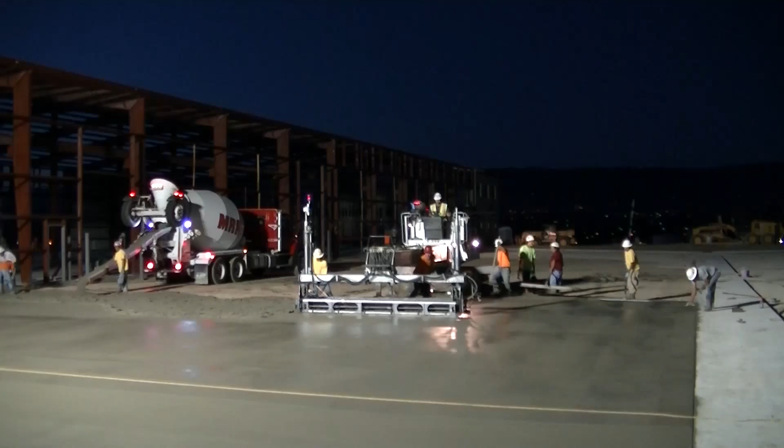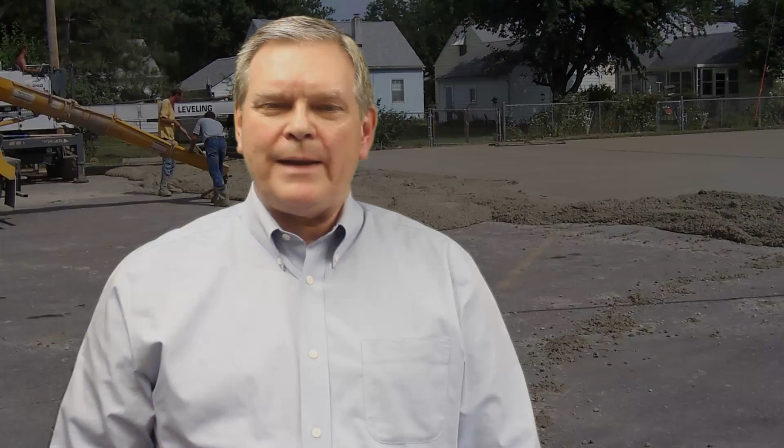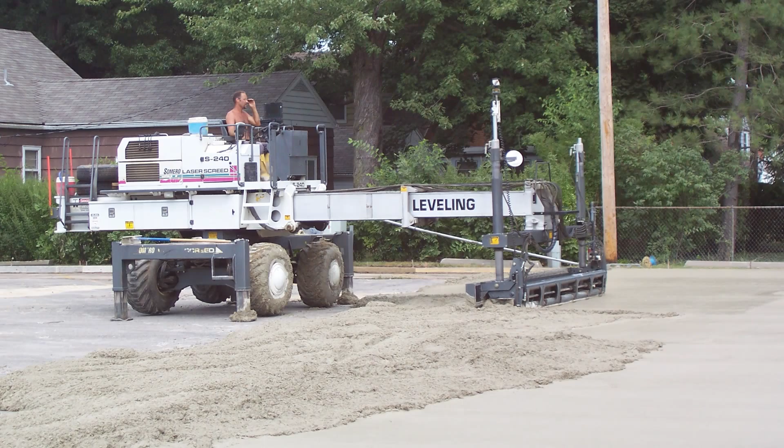Through the course of this video, we're going to walk you through the process of doing concrete overlays on top of asphalt parking lots. Now, this may be a concept that's foreign to some of you, thinking that you can pave directly on top of other pavements. But think about creating a composite pavement or resurfacing the existing asphalt with a longer lasting, durable concrete layer on top. Or if you want to add additional concrete to up the load carrying capacity of the existing asphalt parking lot to change its use.

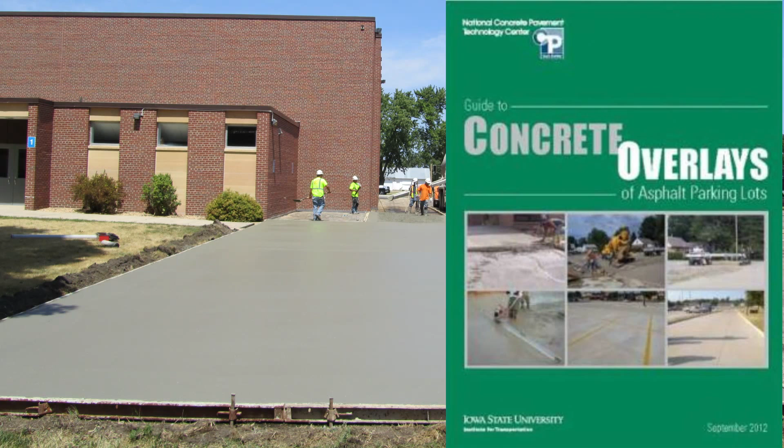We're going to be referencing today a guide that was prepared specifically for doing overlays of existing asphalt parking lots. And before 2012, a document like this did not exist. We've been doing concrete overlays of parking lots for over 40 years. So this is not a new technology, but the ability to take the technology and make it available to the masses across the United States has just come into being by compiling all the information into a concrete overlay guide. That concrete overlay guide was prepared by the National Concrete Pavement Technology Center, who is the expert in doing all types of concrete paving across the nation.

And it's a guide that's been put together to be geographically unsensitive. What do I mean by that? It can be used anywhere in the United States with any type of existing asphalt pavement in place, taking into consideration what the mean average daily temperature is for those areas, and that determines what the concrete thickness will be for any given application.

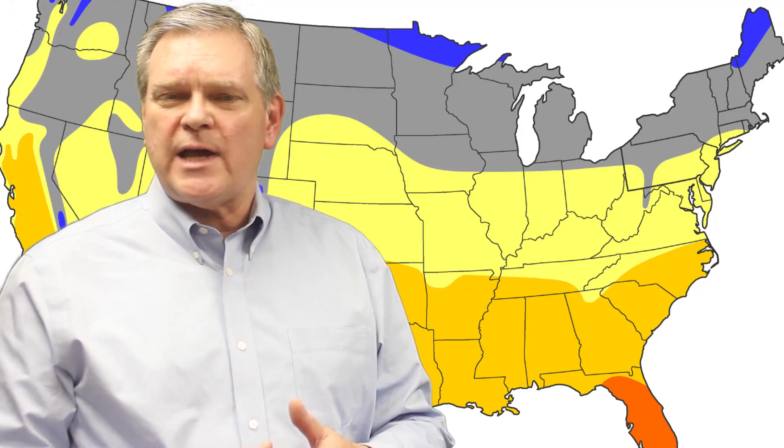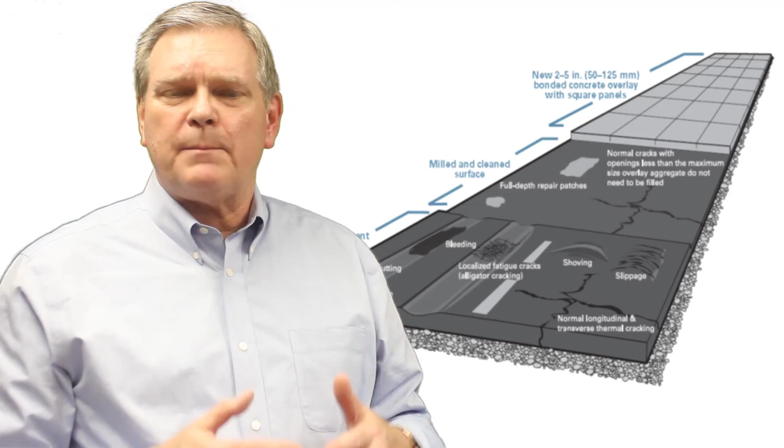This is a widely accepted practice, not only endorsed by the Ready Mix Association, but also by the Concrete Paving Association for doing composite pavements. And when we talk about composite pavements, we think about the terminology of doing layers and layers, building strength into a new pavement. And that's why a thin layer of concrete, something as thin as 2 inches, on an existing asphalt pavement works very well for long-term durability.

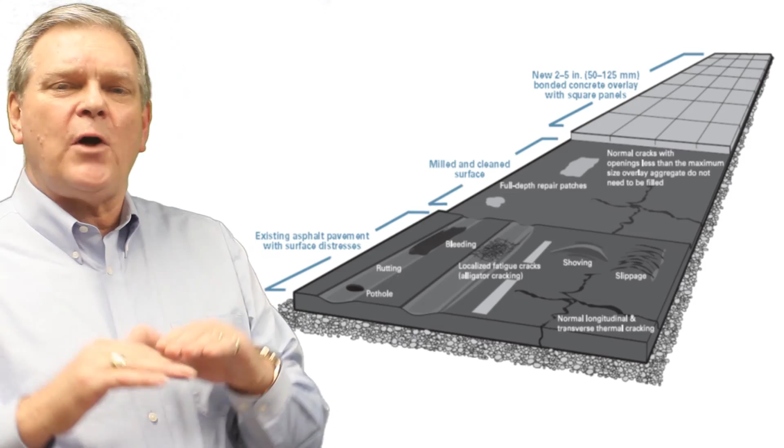Think about taking a piece of plywood, and this plywood gets its strength from different layers being bonded together. And that's really the concept we have when we place concrete on top of asphalt and we bond it to the old asphalt pavement.

The guide was put together in conjunction with the National Ready Mix Concrete Research and Education Foundation, who brought it to the industry at no charge. What do you mean by no charge? Well, it's free for a download that anybody can grab as a free PDF. You can buy printed copies for a very small fee, but it was not the intent of putting this document together to sell it for a profit. We wanted, more importantly, to get the information out to the design community on how to properly design, evaluate, and determine the thickness for the overlay.

It was also designed for the contractor, who could use the document to look at the best practices and the proven practices that have been developed over 40 years of research and proven applications to make these applications successful. In the course of 40 years, you learn a lot of things that will work, but you also learn a lot of things that don't work. And so the intent of this is to make sure every contractor has a proven guide to work from when constructing these overlays. Let's delve into why we wrote the overlay guide and why it's become the document for doing these types of projects.

Prior to 2012, when the guide was published, we didn't have any definitive document that would teach a contractor or a designer how to design and build an overlay project. We had a lot of other documents that referenced overlays on parking lots that really weren't, though, the guide for how to construct them. So we put together a team of experts, much like the concept of an ACI document, and we brought together industry experts from the engineering community and the construction community, and we put together the document with a committee of those people contributing the best practices and proven practices that have been done for over 40 years.

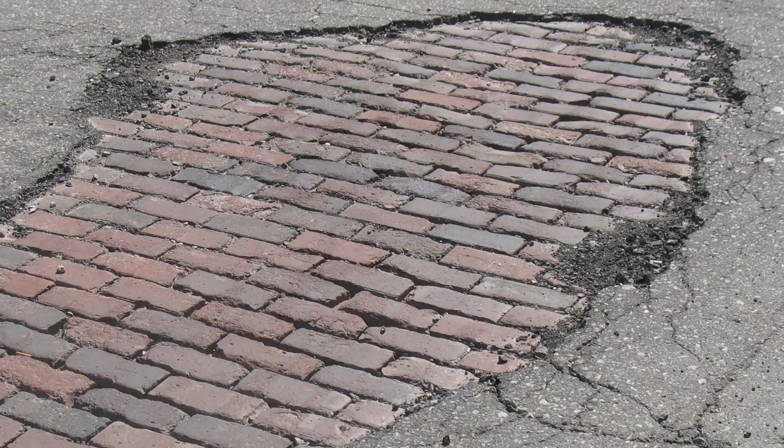Some of the tough things that were hard to do in the beginning were to determine what type of shape the existing asphalt pavement was in. We know that the asphalt pavement has a really good base under it, because one of the things an asphalt contractor does is prepare a very good base for paving the top course on. If we take a look at the existing asphalt pavement, we're able to determine what type of shape that existing asphalt surface layer is in, and also if there are any problems down below in the base layer, they'll show up in the way of potholes and sinkholes and maybe places where the pavement has either heaved or shoved.

By evaluating the existing asphalt pavement, we can then determine what the best approach is. The guide shows us how to do an observation of the existing pavement. It walks us through investigative procedures on determining what the thickness of the old asphalt pavement would be, and then with charts that are developed through the BCOA, which is the Bonded Concrete Overlay of Asphalt Pavements put out by the American Concrete Pavement Association, we are able to look geographically at that mean average daily temperature and determine what the thickness will be of the new concrete overlay.

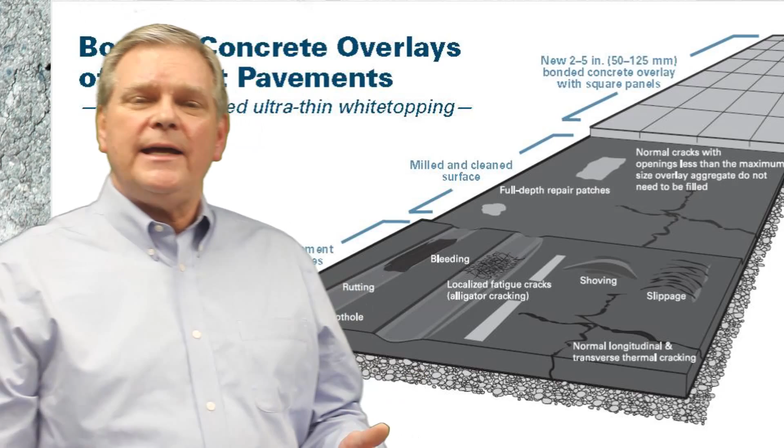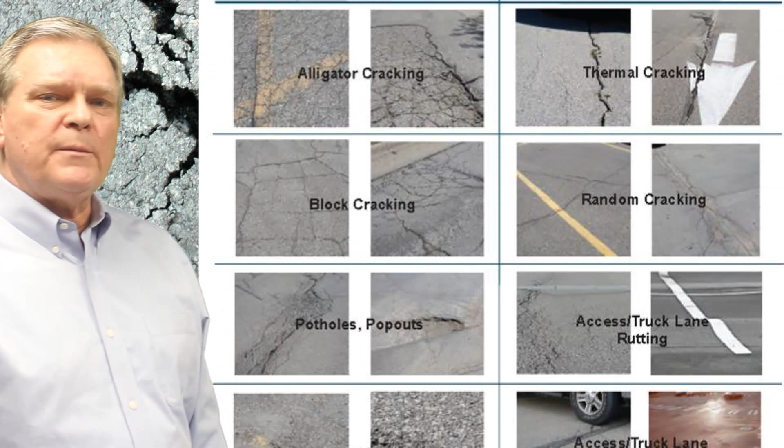And that is the beginning of our process of the investigation of the existing project. Once we determine what the condition is of the existing asphalt, we're able to determine what the best approach will be for doing a concrete overlay on top of the existing asphalt. By using the guides in the book, we give visual pictures on evaluating the condition of the asphalt and determining which type of distress we may have in the pavement, and we're able then to move forward by determining the thickness of the concrete that will be on top of it.

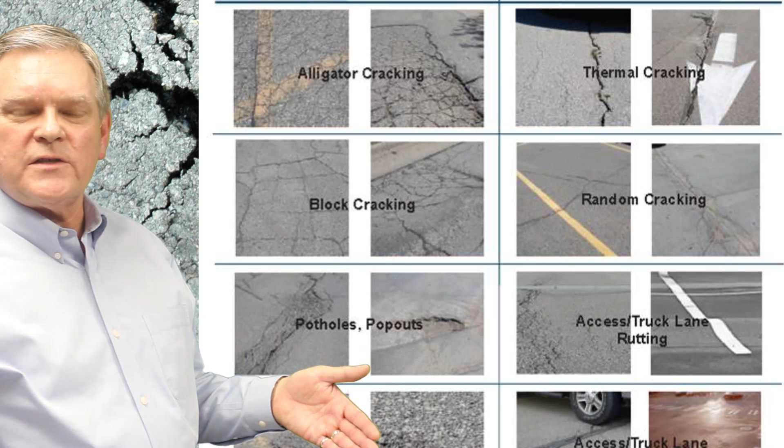We've then broken the parking lot down into three distinct areas: the heavy-duty loads, the light-duty loads, and the industrial loads. And you can see that we have now determined that maybe those thicknesses need to be different in those different areas of the parking lot based on the existing condition that the asphalt contractor left with base material when he constructed it initially. Then we determine what the joint spacing will be, and we lay out the joint spacing based on a conservative joint spacing arrangement, and we're ready to pave.

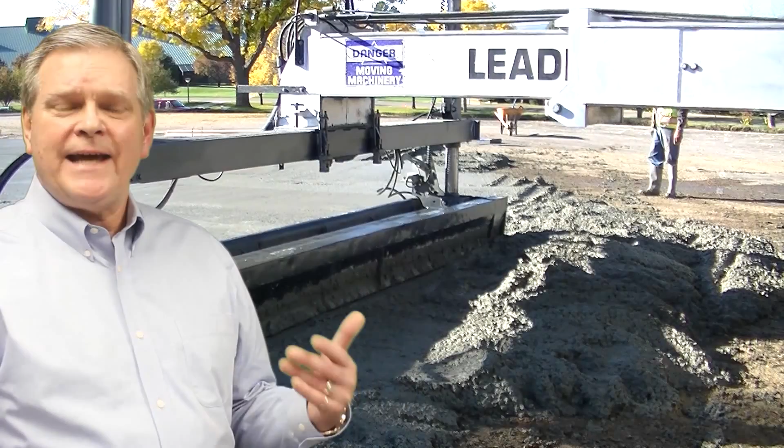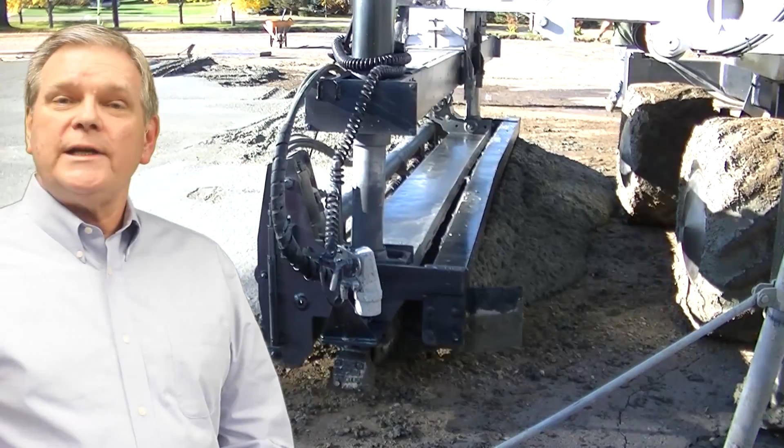From a construction standpoint, what has really moved this technology forward is the advent of the 3D guided laser screed that's come into play over the last 15 to 20 years. Prior to this, overlays of parking lots were done with string lines, hub stakes, pipe screeds and truss screeds, and it was a very long process. What has really changed the process is the 3D laser screed and the total station applications that allow it to read the existing contours of a parking lot and correct any low spots or bird baths that may occur in the existing pavement with the placement of the 3D laser screed.

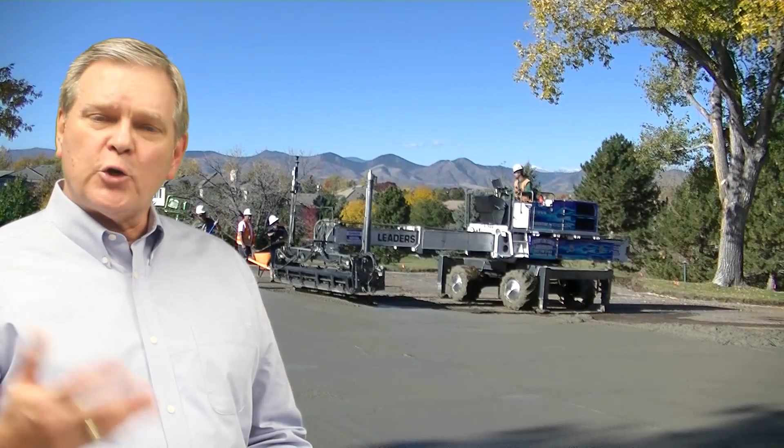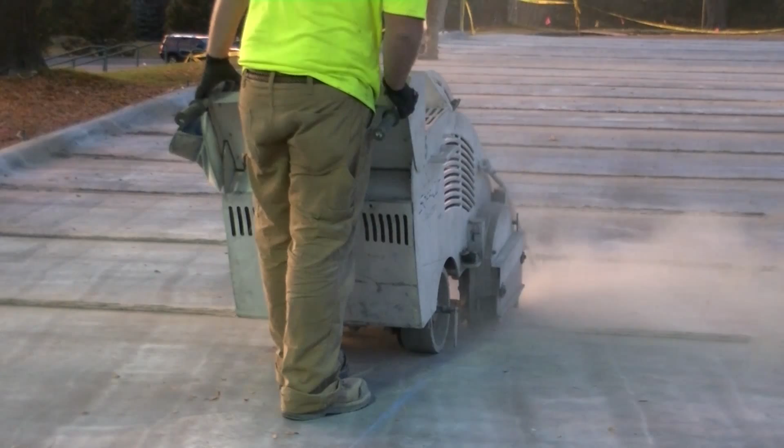It has not only changed that aspect of it, but the production side now has moved from just a couple thousand square feet per day to tens of thousands of square feet per day that can be done with the 3D laser screed. The advent of the soft cut saw also has helped with this, because now we can get on the pavements quicker and saw cut them faster and at the right time, and more importantly at the right time and the right depth of cut with the soft cut saw.

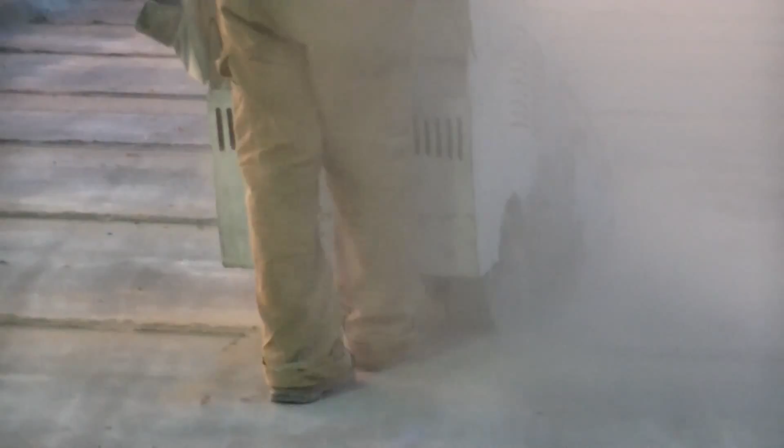You're going to hear us talk a lot about saw cutting, timeliness of saw cutting and the size of panels, and that's very important when we look at overlays. Leonard will talk more about the importance of saw cutting and its timeliness, but we can't stress enough to you how important it is to get the joint layout done in a conservative manner and the saw cutting done at the right time.

You're also going to hear us talk about the surface being clean and dry. It's one of the important things we have to look at, because when we build a composite pavement, we're looking at bonding the concrete into that existing asphalt. And how do we do that? We bond it with the exposed aggregate that is lying on the surface of the existing asphalt.

So one of the rules of thumb is we want to look at a pavement that doesn't have a fresh seal coat. The fresh seal coat will act as a bond breaker, so we want something that has exposed aggregate and a seal coat that's probably 4 or 5 years old, so we get that bond to form that composite pavement. Once the initial process is done, NRMCA is ready to supply you with a design assistance program. You'll hear more about that in the next segment.

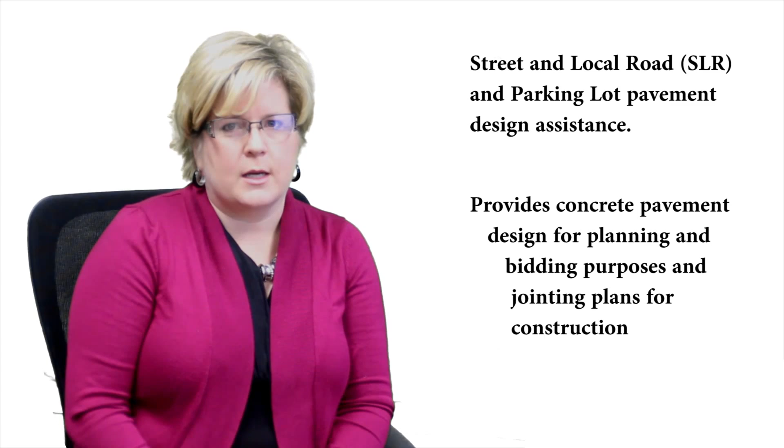My name is Amanda Hult, and I am the Director of Pavement Structures for the National Ready Mixed Concrete Association. As an engineer with NRMCA, I oversee the Design Assistance Program, which provides pavement recommendations for new and existing pavements. NRMCA can provide pavement recommendations for streets and local roads as well as parking lots. These recommendations can be used in the bidding process as well as for planning purposes. Joint plans can also be used to help with construction of the parking lots.

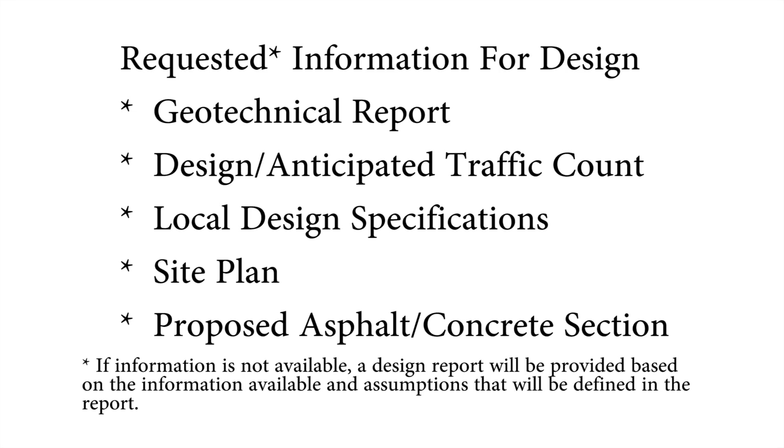NRMCA requests the Geotech report for pavement recommendations. If this report is not available, a pavement section can still be supplied. The pavement reports can be supplied for new or existing pavements. We can also provide reports for conventional concrete, roller compacted concrete, pervious concrete, and concrete overlays. The pavement reports can be any of those or a combination of several of the different types of pavements.

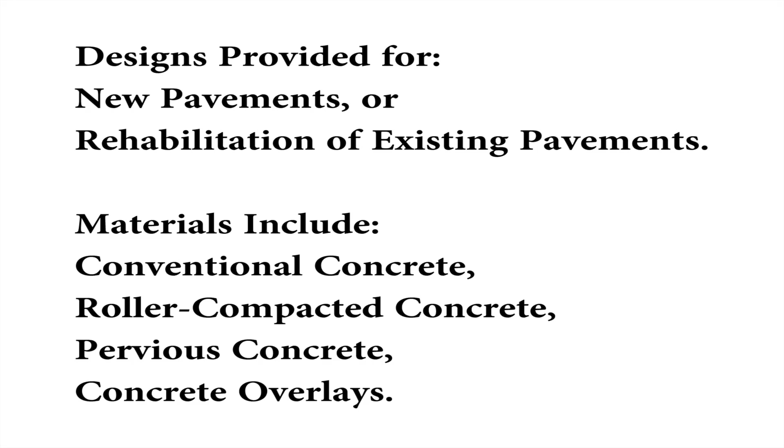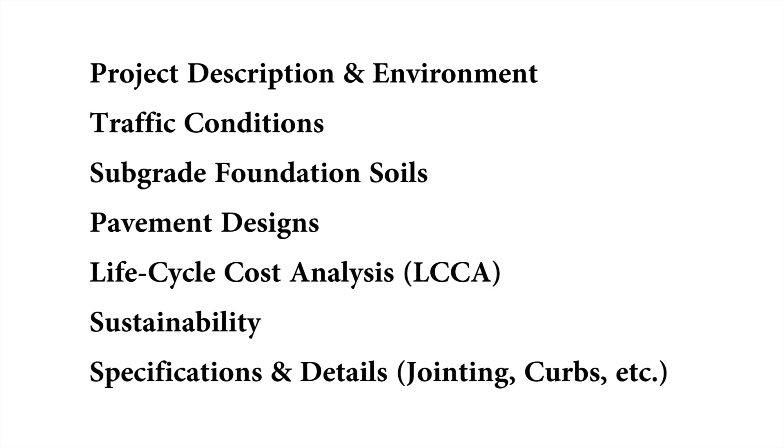Within the pavement report, you will find a project description as well as any environmental information that is known about the project. Traffic information and subgrade soils information will also be provided. New and existing pavement sections will be determined and placed in the report. A life cycle cost analysis can also be provided for the pavement section. Sustainability and specifications can also be included in the report.

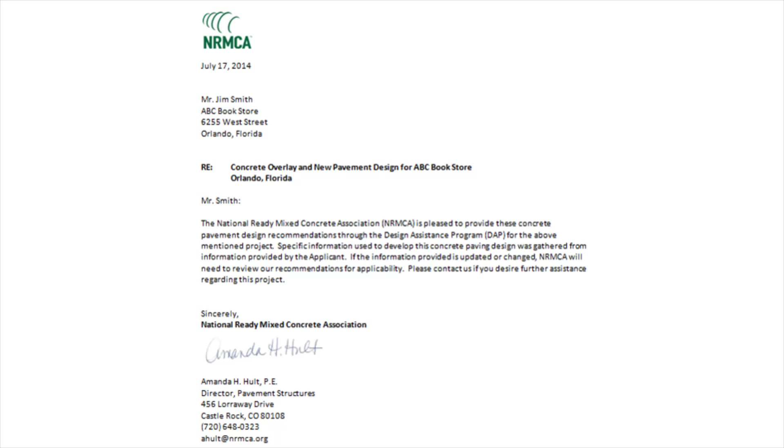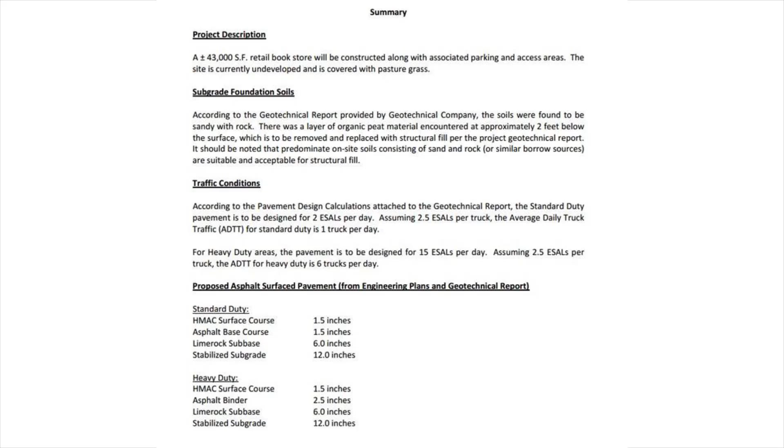Here you will find a copy of our cover letter for our pavement report. It is signed by a licensed professional engineer, but is not sealed. Here you will find an example of our pavement design reports. It is typically 8 to 10 pages in length and has a summary report, as well as very detailed information on the pavement section. Along with the pavement recommendations, you will also be supplied a jointing plan.

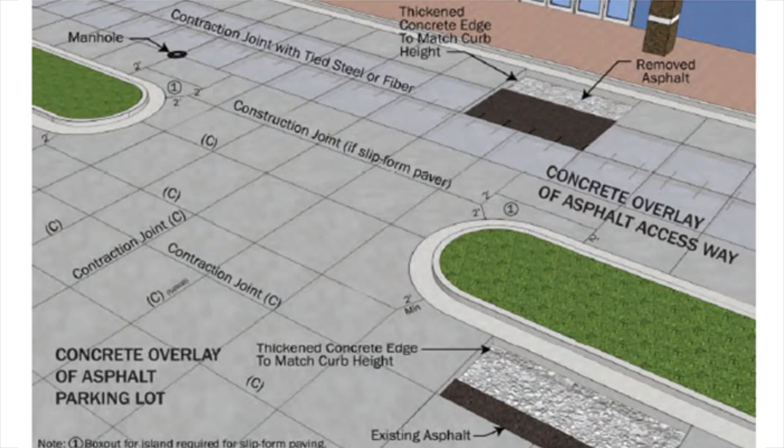Here's an example of a recommended jointing plan. We'll label the joint plan with the recommended joint spacing, as well as the different types of joints that are located on your site. We'll also include a list of general notes that can be used for your jointing plan. All of these notes are taken from ACI 330. These jointing plans can be a collaboration between NRMCA, the engineer of record, as well as the contractor.

Last thing in the report is your guide specification. Here we have a guide specification for streets and local roads, as well as a separate guide specification for parking lots. The information is fill in the blank and can be modified to fit your project.

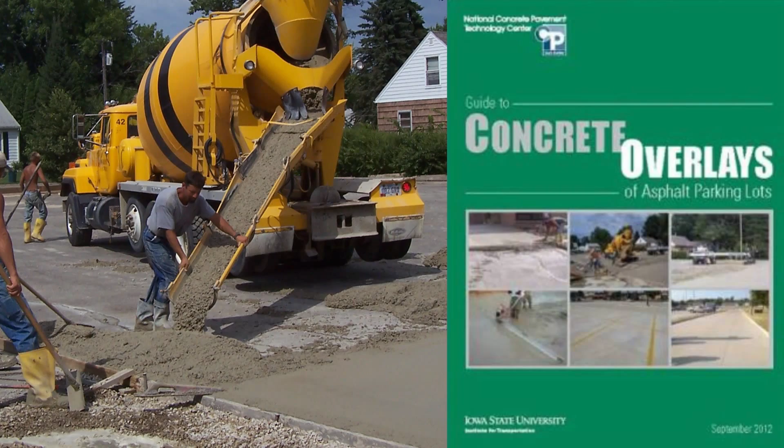In producing recommendations for overlays, the Guide to Concrete Overlays of Asphalt Parking Lots was used. NRMCA incorporated this guide into the pavement recommendations for the Pinehurst Country Club in Denver, Colorado. NRMCA collaborated with the contractor on Pinehurst Country Club for joint plans as well as pavement recommendations.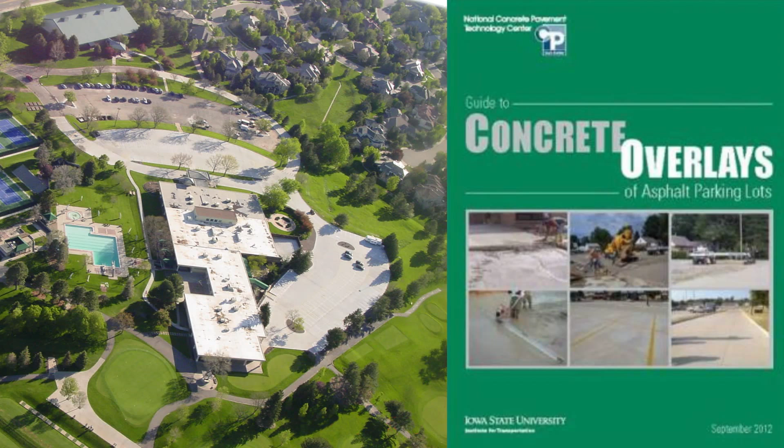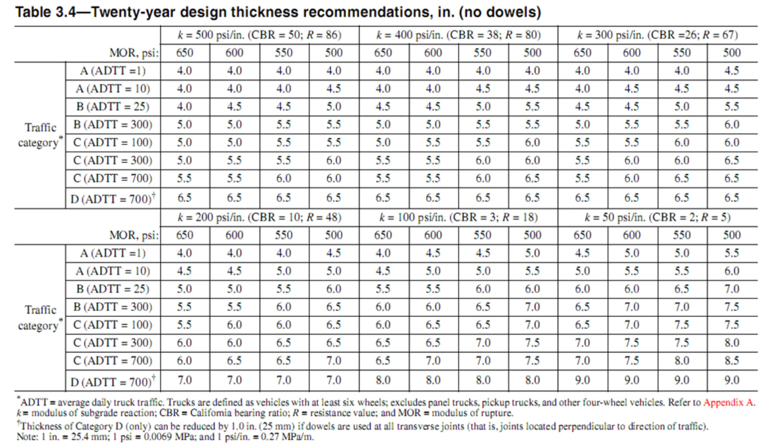When providing pavement recommendations, NRMCA incorporates the ACI 330 design charts. This design chart takes into consideration the subgrade soils that are on the site, as well as the traffic that will be utilizing the concrete parking lot.

Additional information may be found on concretepromotions.org. In the upper left-hand side on the screen, you will see a link for parking lots, and then just below it, you will see a link for streets and local roads. More information can be found on each of those.

Thanks, Amanda, for that overview of the Design Assistance Program. It should be remembered that the Design Assistance Program through NRMCA, or the National Ready Mix Concrete Association, is not in competition with local designers. It's simply a way to get a free second opinion, or in some cases, just to do the heavy lifting of the design, where the local engineer and consultant will take a look, sign off on those plans that are ready for construction, or make changes that they see fit for the application.

Once the Design Assistance Program is done, you're ready to approach a qualified contractor to look at your project. You can supply them the Design Assistance Program information that we prepared through the National Ready Mix Concrete Association, and he'll bring his own ideas into the project.

Hi, I'm Leonard Velasquez, SLB Quality Concrete. The presentation that was given by John Hanson earlier of what the NRMCA could provide to help the contractor and the job is crucial to a successful project. After that has been done with the design and evaluation, the process is to turn it over to a contractor, because at some point there has to be an estimate done for this. You need to work with the clients.

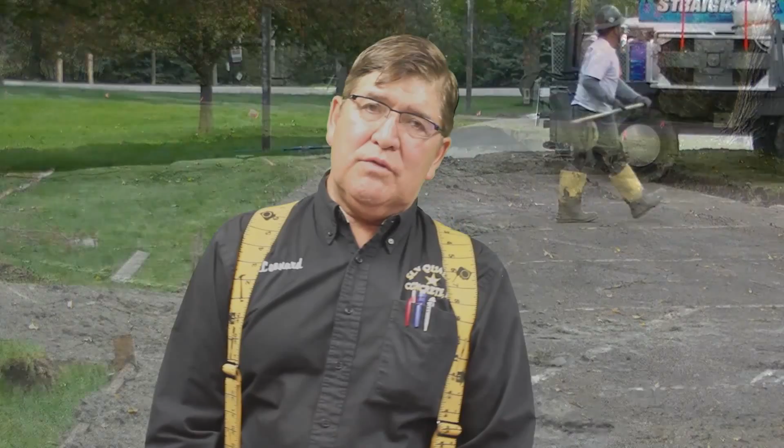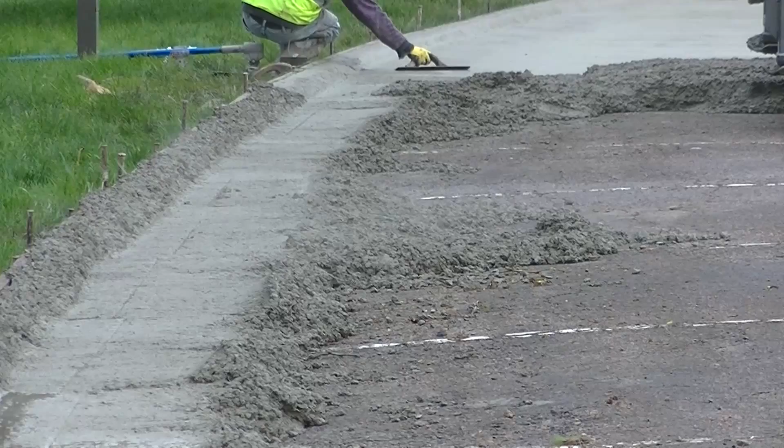One of the challenges of Pinehurst was to address the drainage. I accomplished this by overlaying the curb. I actually took out the back of the curb and raised up the top of the curb 3 inches. That allowed me to go ahead and get the lot to drain right.

The reason it wasn't draining right was originally the curb and gutter and everything was put in right, but they didn't have wide enough valley pans in the area where they needed wider valley pans. And there was one overlay that was done at some point in its life where they put 1.5 inches of asphalt over 3 inches of asphalt, but they transitioned into the curb and gutter, which was actually causing a blockage of the water instead of letting it drain like it should have. That's why I raised the curb.

Another challenge that needs to be worked out for a successful project is it's very important to work with the facilities management to be able to stage your work to where it has the least effect on what's going on within the facility. As a contractor, this is what I feel is very important.

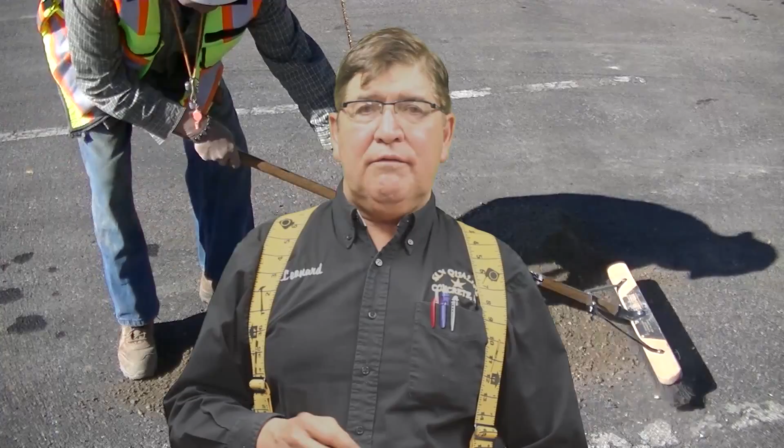A lot of different steps have to be brought together. We have great design assistance from the NRMCA with their design program, but you've got to couple that with a lot of coordination, good pre-planning, good material. There's just a lot of things that need to come together to give the owner what they're paying for. A long-term pavement.

A real important step getting ready for pavement before that is to go and address the cracks past a certain width. And it talks about that in the design manual. When does a crack need to be addressed, how wide, and what you should do. One way to do that is to fill it with crusher fines and fill the crack so that it doesn't give an irregularity to the bottom of the concrete. There's other ways to do it with flowable fill. On some of the cuts across on Pinehurst, we went ahead and put concrete back.

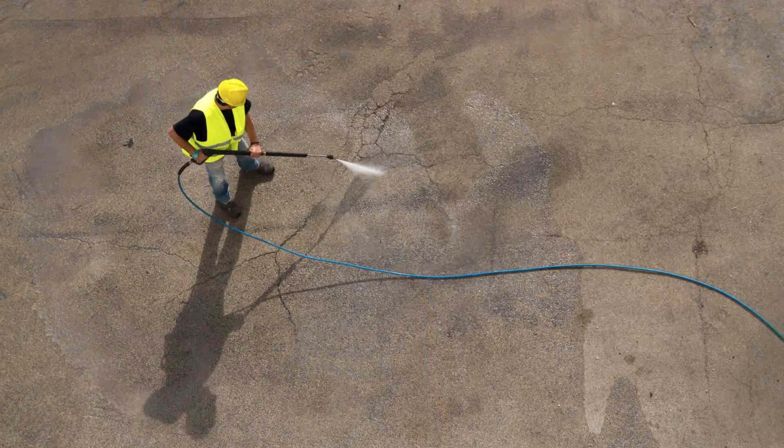What's really important is that the concrete that you're overlaying the asphalt with doesn't see a lot of variance in the subbase. You want to keep that as uniform as possible. Prior to actual placement of the concrete, you want to clean, as it was stated earlier, so that there is a good bond of the concrete to the asphalt.

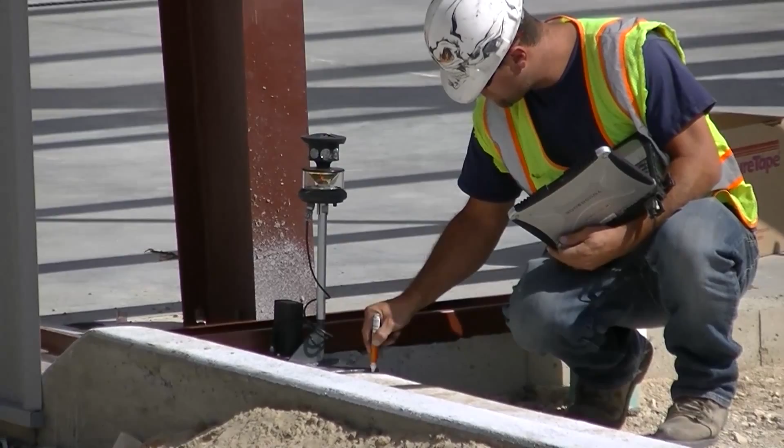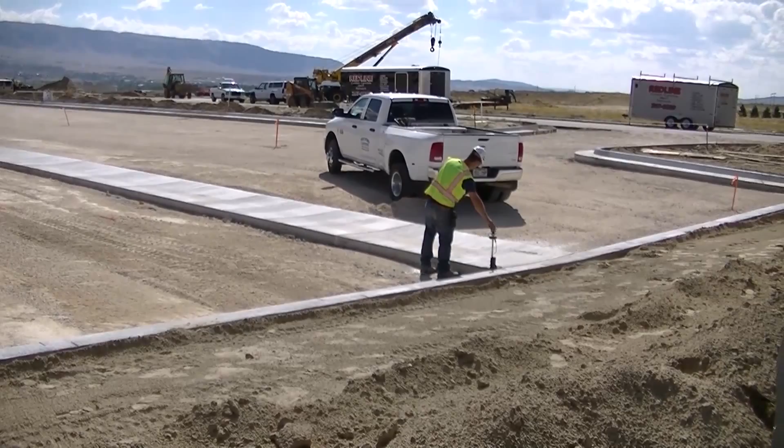Prior to the placement, getting ready for the laser screeds, next day's pour, grade needs to be established for drainage, the top grade. That's accomplished by several different ways, but they like pins around every 20 foot. After that is set by me, the contractor, the operator of the laser screed will come in and shoot the top of the pins. That actually gives grade into the computer program that the next day will be used to let the laser screed know where it's at and tells the screed where to put the grade. Very important step.

In preparation for paving, it's very important to go ahead and address the top of the asphalt and areas of distress, which could be areas that need to be removed if there's a lot of distress, recompacted, or put back with flowable fill. Large cuts in the asphalt or cracks can be addressed through putting in a sand material or a flowable fill.

Also at Pinehurst, the facility needed to have some underground piping put in prior to the actual placement of the concrete. So all of that work needs to be done way ahead of paving, so when you're actually paving, you don't have to be holding back for anything.

In the design of the construction of the pavement, another step is to design how you're going to tie into existing structures or pavements that are already there. One way to transition into existing curb and gutter pavement is milling. You mill down the thickness of what's needed for the concrete pavement, and then you transition that up in 8 feet, 10 feet, so it's not noticed.

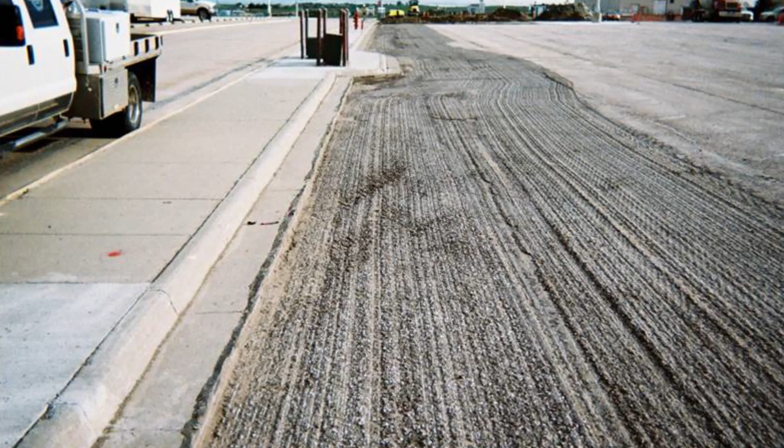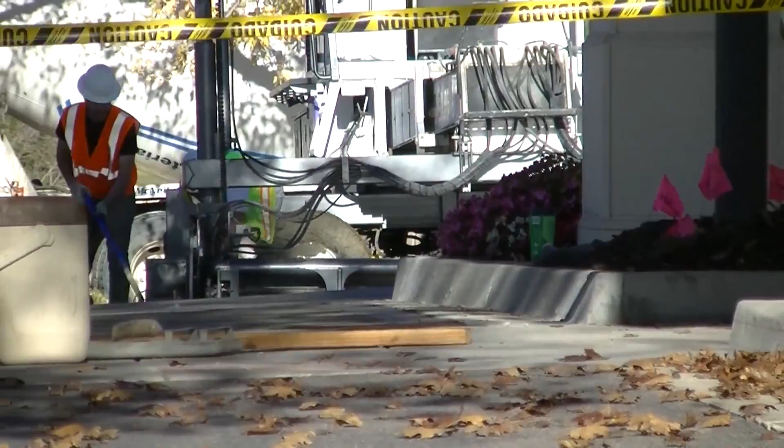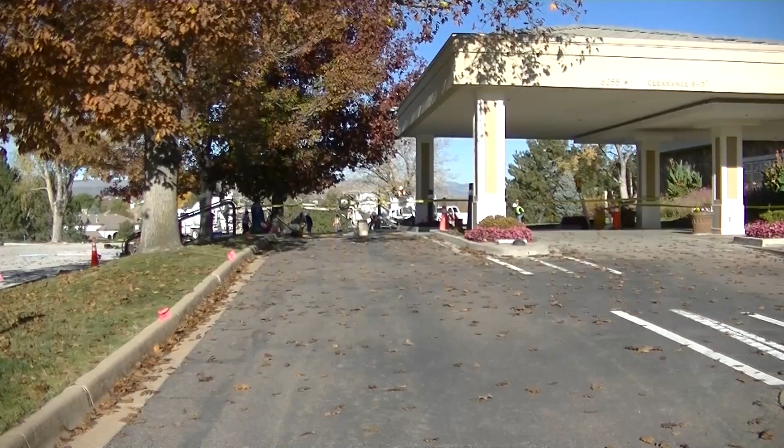The other issue that you need to deal with is existing manholes, light poles. There can be a lot of things in a parking lot that need to be addressed. At Pinehurst, I went ahead and raised the manhole cover to compensate for the new pavement. Each job and conditions will be different, but this is where the challenge comes in. It gives you a lot of areas where you can figure out what's the best way to accomplish what you want.

There's key elements to a successful project. Laser screed, as John touched on, is one of the best ways that I found to do this kind of work, because the laser with the 3D profile controls grade from top down.

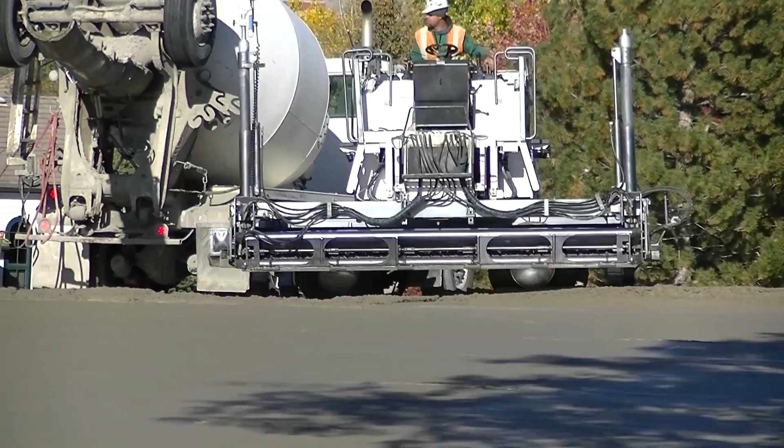In other words, once grade is set, we'll have pictures showing the laser screed operator setting existing grades that are put by me for the drainage plan. It controls the grade during placement to make sure that the drainage is proper. It's been around, I think, since around the year 2000 when it started to be perfected, but when they went to the 3D profile system and the computer programs that allow it to do contour paving is when this type of work really took off. It is the tool of choice for this type of work.

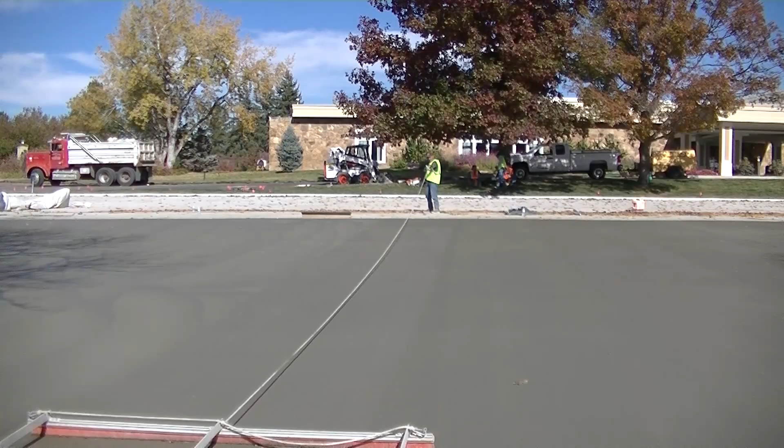The second big part of it is the ready mix producer. You need to work with them because timely delivery of the concrete is crucial to a successful project. After the actual placing of the concrete, the texturing is the next step. That's ahead of the saw cutting. Very important that that is planned and that procedure is done properly.

A real good way to texture the concrete is with a broom. In our slide that we're showing you here, we have a rope pull-across broom that will texture to different degrees. That's very important. There's different degrees of texturing on the broom by just replacing the broom hardness of the bristle. The pull-across rope broom works really good because most of these placements with the laser screed are wider where you can't reach them from the side, and that's why the rope broom is the choice for my paving because of the width of the paving.

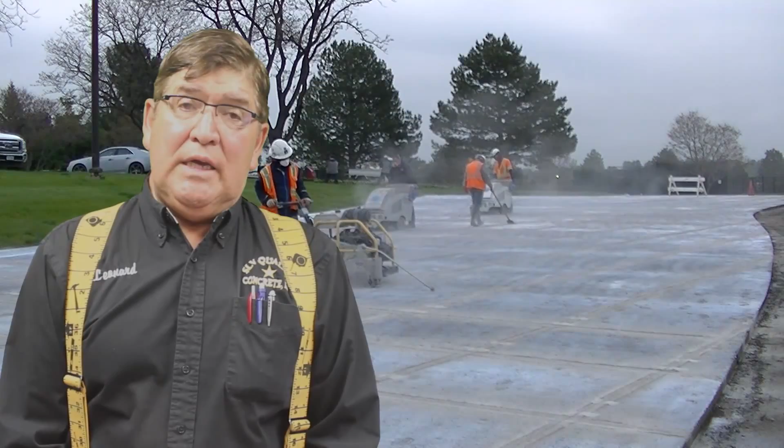Another key element for success is the saw cutting. It's for concrete overlay because of the thinness of the concrete and going with a thinner concrete pavement. Bringing the joint spacing down is why it works. That has to be pre-planned out because at the point that you're cutting, you need to be able to cut as soon as possible once the concrete will allow that. And that's a lot of cutting. So that's a very key point that needs to be covered in your initial design for construction.

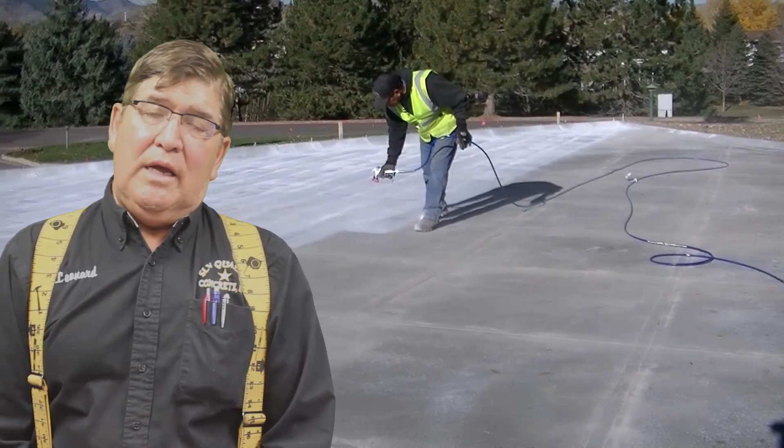A lot of things that need to happen with a successful project are just inherent to concrete. So as a contractor, you need to use good concrete practices. And the one thing that needs a lot of attention besides just the placement and the saw cutting is the curing process. And I don't think in the past proper attention has been put to that. So a very important part is to make sure that you cure the concrete with approved curing compounds at the rate that they need to be applied. And they need to go on as soon as possible. And that's a successful concrete paving project.

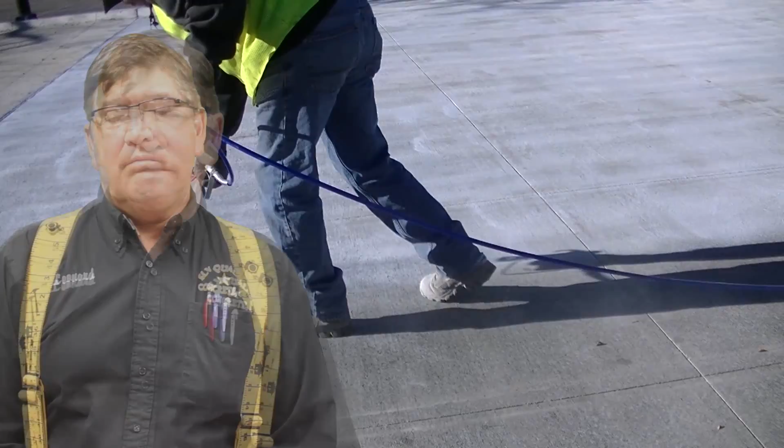Well, now that you've watched this video, you may still have questions as to why someone would even consider using concrete as an overlay material in place of asphalt that they've used for years. This is a proven technology that gives owners a choice. In the past, they've only had a choice of one paving material. There are some benefits of using concrete as an overlay material rather than doing the same things that they've done in the past. Let's just recap quickly some of the benefits of doing concrete overlays on existing asphalt parking lots.

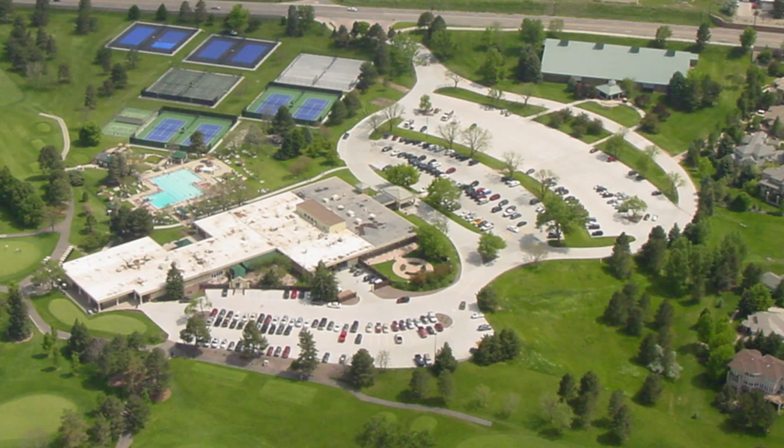It renews the surface with a longer lasting material, and it gives owners a choice. Time and again, when we work with owners, we find that they want a choice, that they understand that there's only two choices for paving, but they would like to have that choice. And once they take a look at the concrete overlay, they make the decision to go with a longer lasting material. From a construction standpoint, it permanently corrects and fixes low spots with a contoured paving program. And whether those low spots come from natural settling or simply from the tire impressions that occur in pavements, it fixes those permanently.

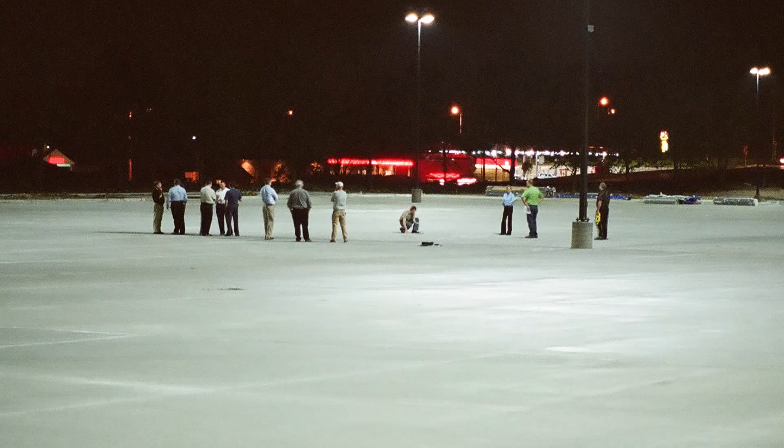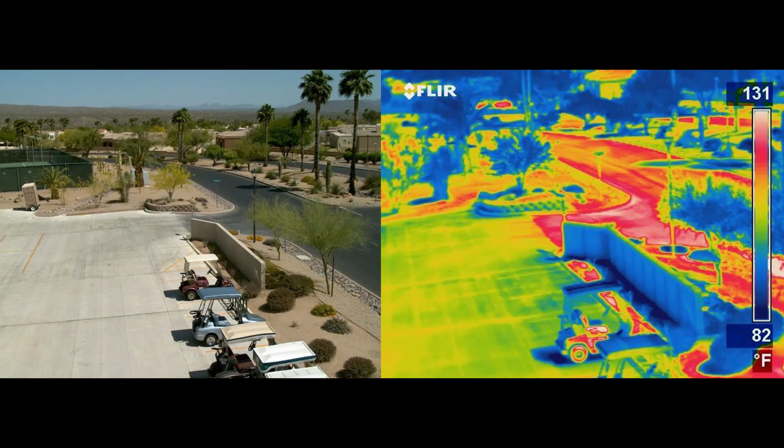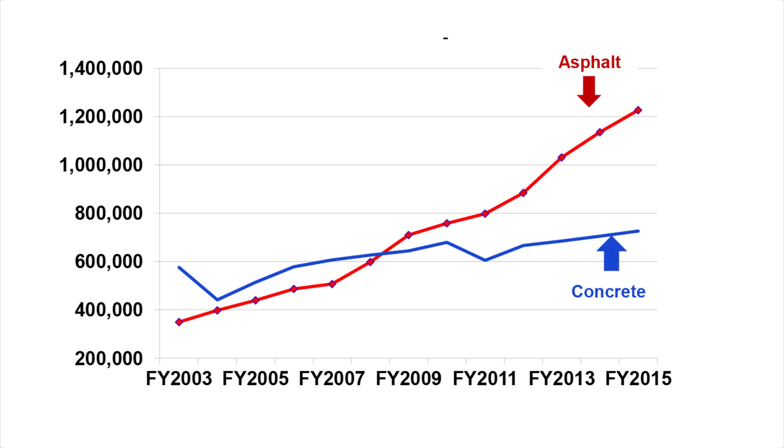They never come back. It optimizes the new lighting that we see being used across the United States, and that's the advent of the LED light. Many customers have told us they need a lighter colored paving material when using LED lights to get the best optimization. Lighter colored paving reduces heat island effect, and that's top of mind in most cities across the United States. But it greatly reduces the interruption to your business. Once you pave with a permanent paving material, you don't have to shut down portions of your parking lot in years to come for maintenance and things that disrupt your business. There's long-term cost savings. With the cost of paving material in the marketplace, concrete has never enjoyed the competitiveness it does today in the history of paving.